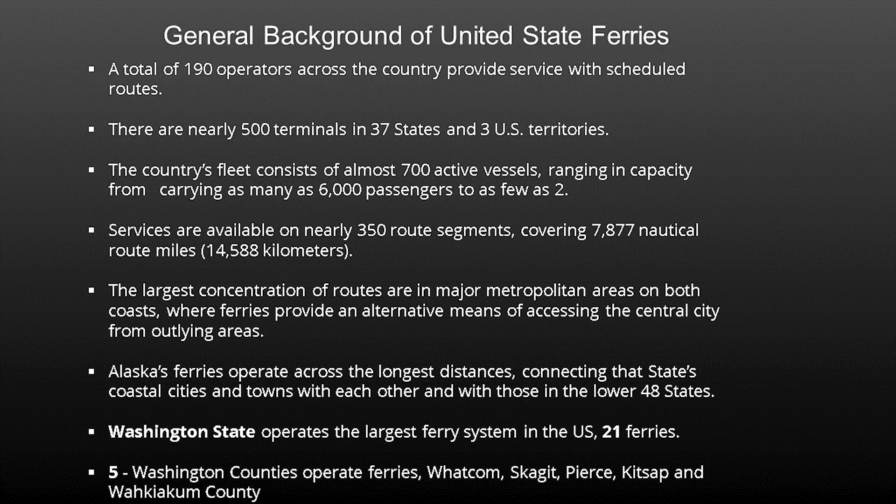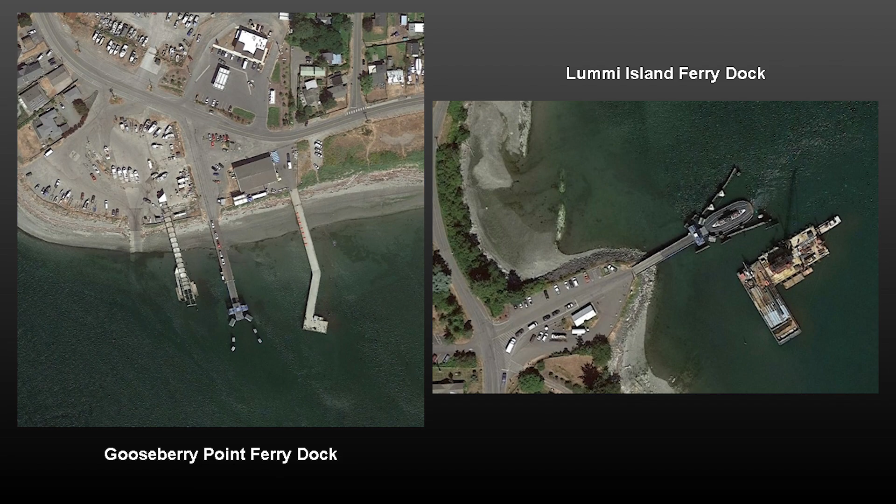It's got so much paint on it, when you actually go to the shipyard and they start to scrape it, it's almost a quarter inch thick of paint on this boat because we don't sandblast it down. It costs way too much.

It's crewed by 3 people, and I actually refer to this thing as the battering ram. This ferry has done more damage to more structure than anything. You always get those late calls and you find out it goes through the dolphins, it goes through the breakwater, it goes into the waler, or whatever it may be. It's always something.

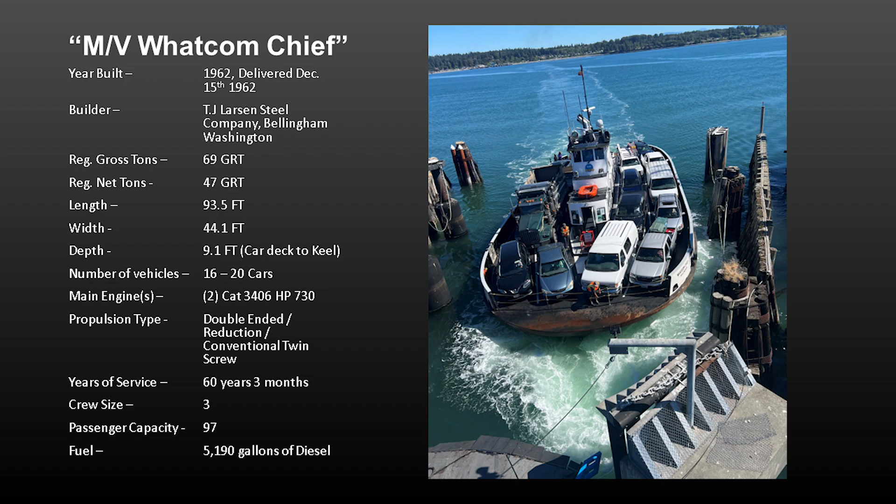With that, the boat only drafts about 5 feet of water, even though it has a 9-foot height. It only carries about 16 cars, especially if you put a truck on it. One semi-truck with a trailer takes one whole side. And the ferry is so tiny that when you're in your car, if you have to get out because it's sinking, you better roll down your window, you cannot open your door. So that's another reason why we're getting a new ferry.

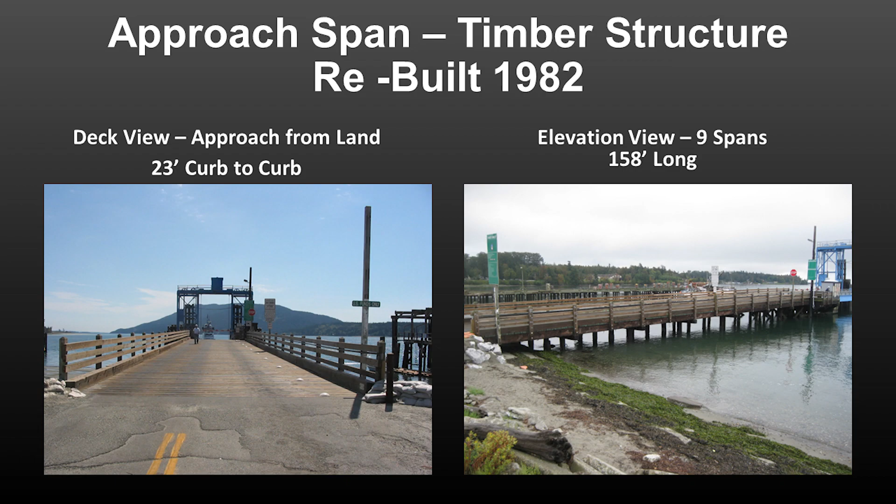So these are our approach span. The approach span was rebuilt in '82. It's 23 feet wide from curb to curb, 158 feet long, with a number of timber bents. This is the first structure to the next structure.

Basically, your elements on it are your typical rails. They're timber, it's all timber, this whole entire structure. We got treated timber, which now I'm no longer allowed to use over water, which is an interesting problem. And the deck on this thing has been replaced, so we're working on the third time right now since the time it was built.

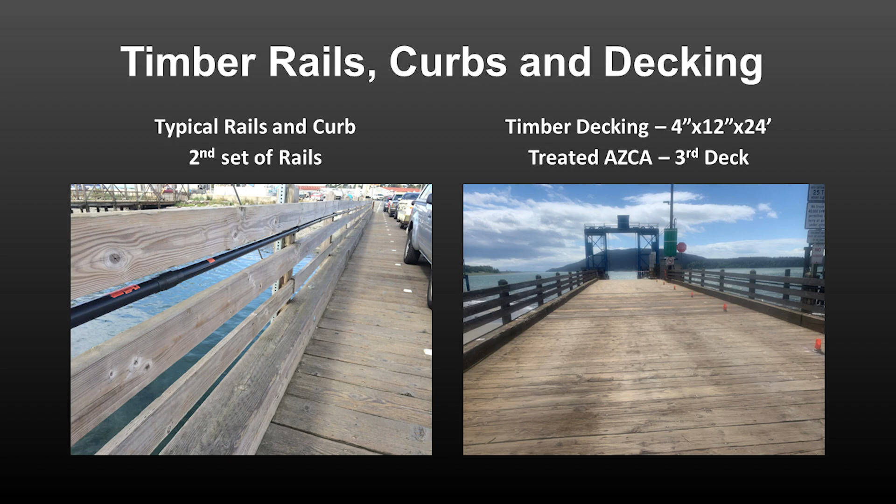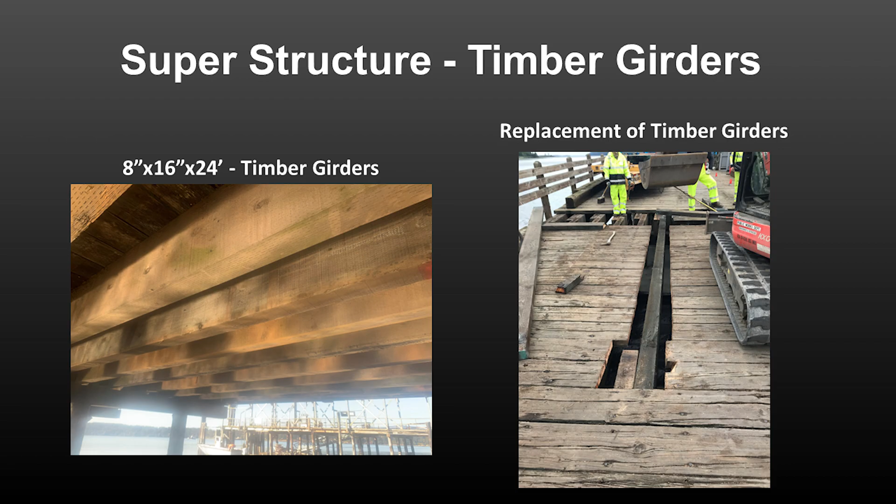Superstructure is just timber girders. They're pretty good size. We cut a hole through the deck so we can replace that girder, and then we replace the decking, of course. That girder I brought up on my personal truck because we couldn't get our crews down to get it, and we were waiting for months, and it was an emergency. So that's the kind of things we do.

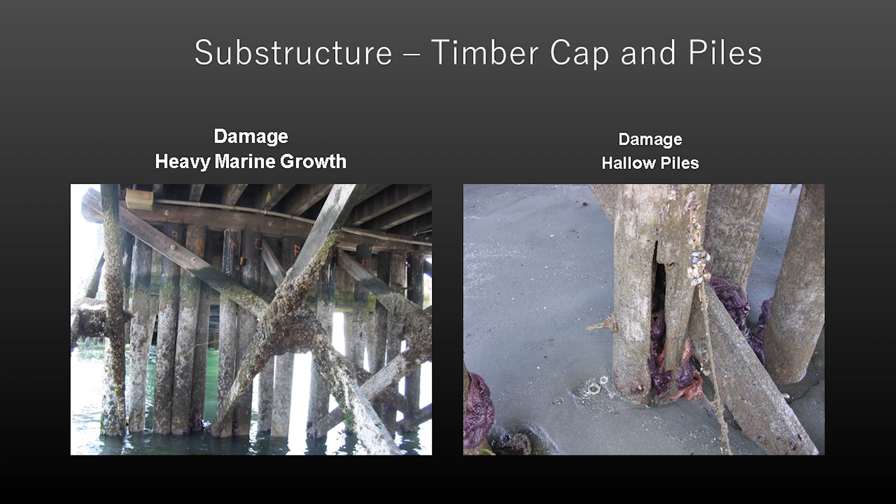The substructure on this is some of it the original structure before the rebuild. This structure was built, from the only information I could find, in the early 40s, most of this timber structure. That bent of all those piles has got added piles. Some of the original piles from the original structure are in there. You can see we get hollow piles from the marine growth on the bottom, or worms and things like that.

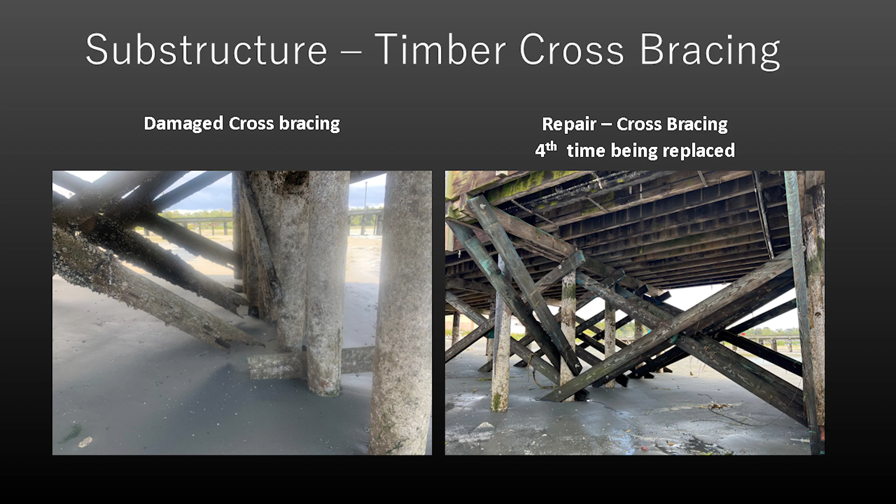Cross bracing, I just want to put in there, this is the fourth time, the third time since I started with the county, we've replaced this cross bracing. It does not last very long. Even being treated, with logs that are in our water hitting it and damaging it, it's just continually a problem for us. And it's amazing when this stuff is not in there how much the structure moves. It wiggles pretty bad.

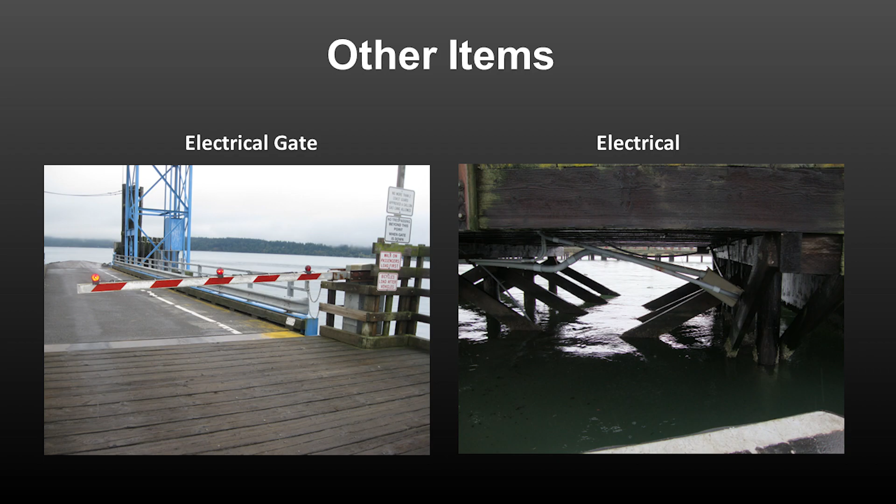The other items on this particular structure is electrical, which you can see is hanging. We're always fixing things like that. We get logs that rip it down. And then we have a gate on it.

You can always tell a new islander too. They always got a pretty car. All the islanders that have lived there a while, their car is not in good shape because we are over saltwater.

So the next part of the structure, like I said, the timber one feeds this one. So really it's one giant facility, but they're two different structures. This one was built in 1986, and it's a steel transfer structure. I just wanted to show you what it looked like coming in as you're coming on the ferry, on the left-hand side there. And the right-hand side is, of course, an elevation view of it.

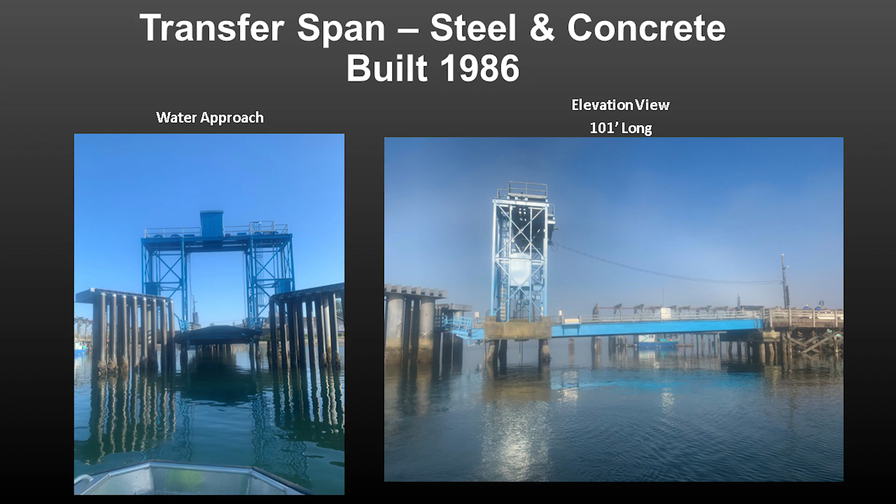The decking, it's asphalt over laminated timber, and it's got steel handrails, guardrails, timber curbs, and it's 24 feet wide. This asphalt I've replaced twice, and it's ready to be replaced again, because when you're paving over laminated timber, it doesn't last. It's just constantly breaking up.

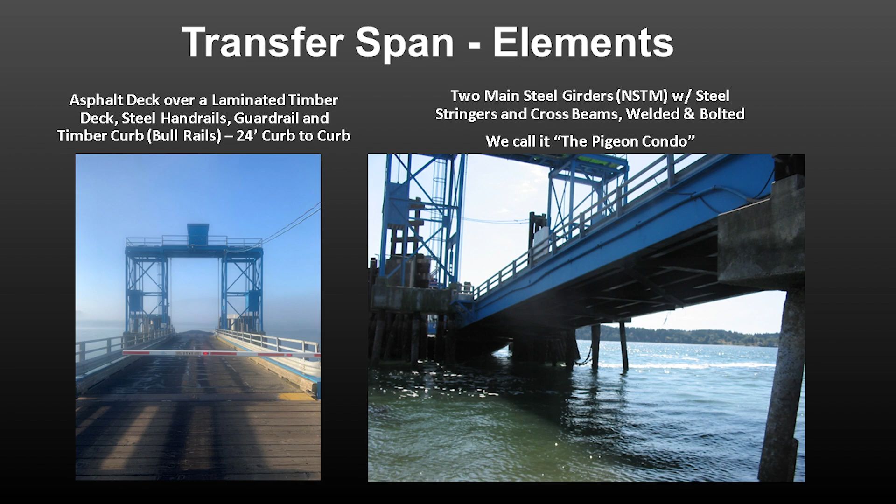Then we got to deal with, of course, we got fracture critical, which is no longer called fracture critical, but sorry, you'll hear me say that because I'm still trying to get used to the new term. We have two steel main girders with floor beam stringers and cross bracing underneath. We call it the pigeon condo. Every single cross member gusset plate has a pigeon nest on it. And we deal with them. They're heavy and they're thick.

And I learned that you never see a baby pigeon because they don't leave until they are full grown. So you'll never see a baby pigeon. So they make a mess. Their guano rips apart our paint. So we're actually using a paint system under here called coal tar, what they use on freighters, on big ships.

Then the other parts of this thing, we have our apron, which is at the end of the transfer span. That's what actually goes down onto the boat, so you can transition onto the boat. It's got a bat wing system, really hard to see in here. I don't know, can you see my mouse at all? That's all right, but it has pins that run all the way through there. You got pins at the other joints, so there's a lot of pins on this system.

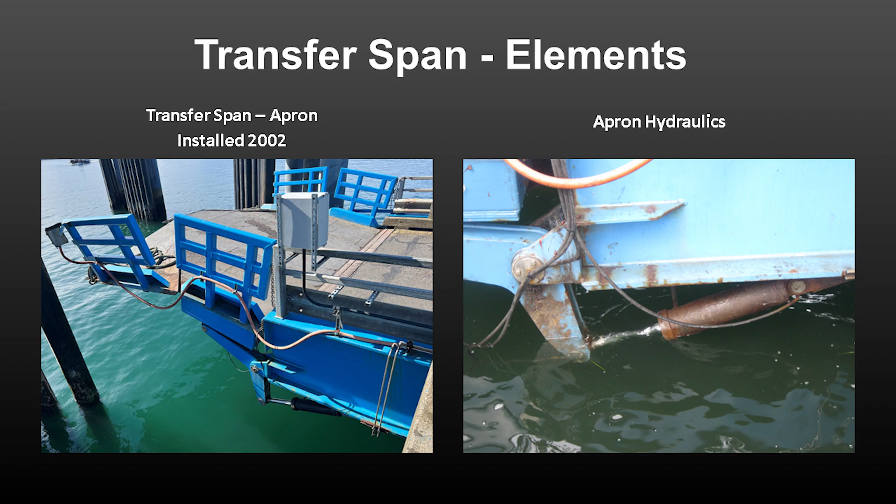And then we have hydraulics on here. And our ferry crew, since they don't fix any of the problems, they like to make sure our maintenance crews stay busy, they put this ramp into the water quite often on us.

I'm replacing those hydraulic arms twice a year. The salt water just tears them apart.

Other elements on this transfer: you've got your bearings up front on the concrete cap. We've got a concrete cap with steel casings with concrete poured inside, and then of course, we have cathodic protection on all the steel piles out there.

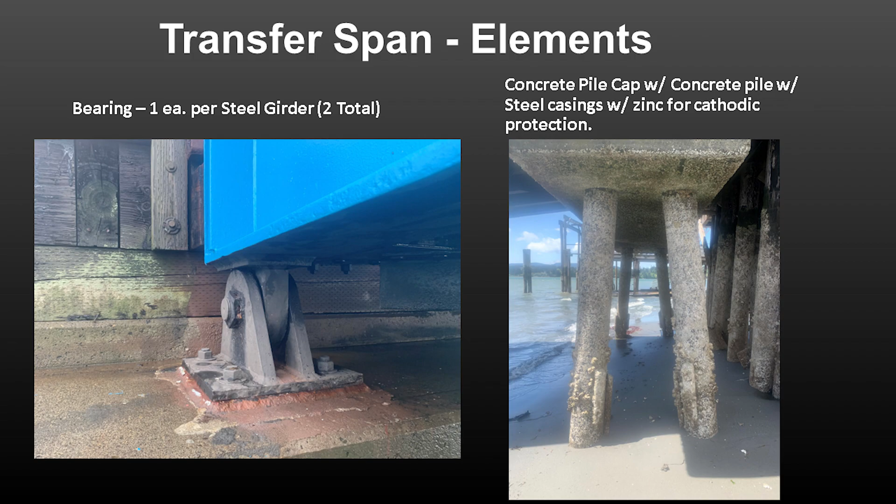Even with all the cathodic protection, we're still having traces of electrolysis on the boat. So it's an interesting area. We haven't found the power source that's causing our problem yet.

Got our head frame. Head frame is the upper structure. It's got the motor house up there that actually operates the transfer span up and down. And then we have concrete counterweights. There's 2 of them, one on each side, and they weigh about 22 tons.

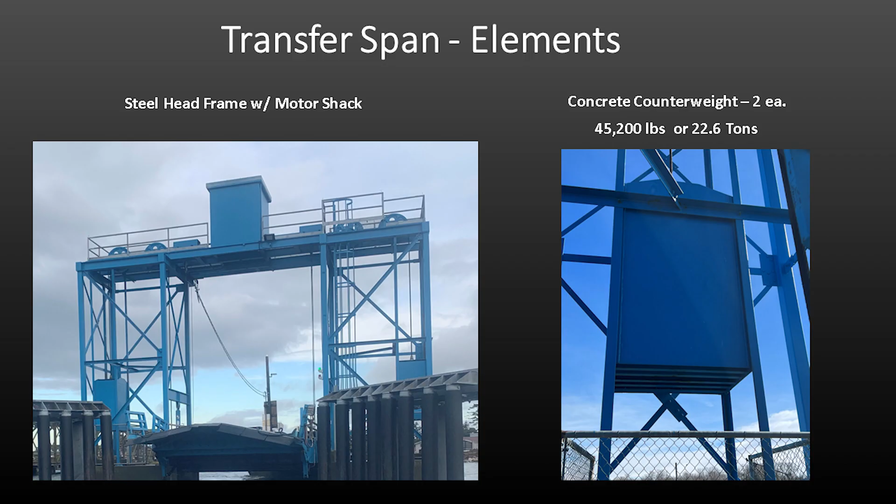It was kind of funny the other night. I was working on my presentation a little bit, and my wife walked by. She looks down and asks why we had a guillotine on our ferry. Kind of looks like it when you're there.

We actually have hydraulic pumps, and they're inside another box for protection. So if they leak, we have our motor up top in the motor house. That little 5-horse motor operates this ramp up and down.

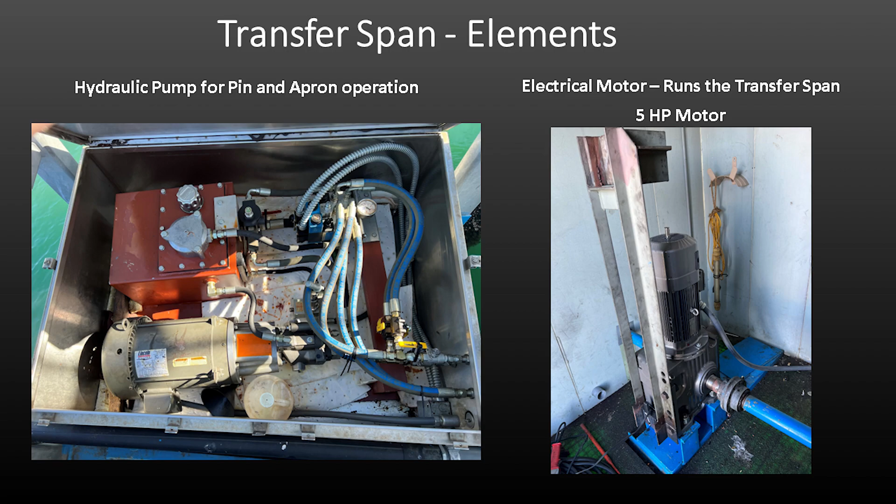You can see a little tiny nub on top of the motor. You actually hook a drill to that when this motor goes out. We can actually operate this ramp with a handheld drill. Yeah, but it's really slow. It just takes a long time.

It goes down, the motor goes down to a gearbox, then goes to 2 shafts that go out to the running lines.

Then we have, like I said, these fracture critical members. The most interesting one is the live load hanger on your right-hand side. It's really hard to see, but it's really bent. That's a common thing for us.

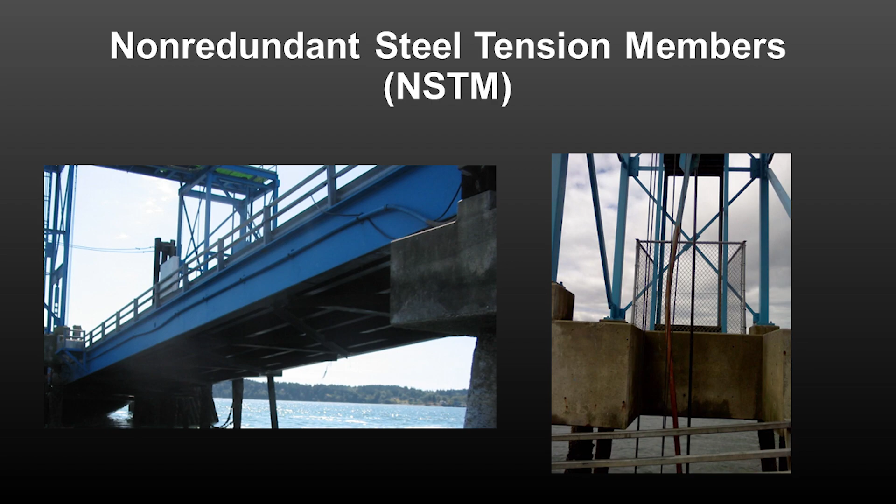This dock was built in a way that, when the pins are put in place, allows the transfer span to come up and allows that live load hanger to go up. It's fixed up top, so it just bends them.

Every time it bends, we're looking at $25,000 to get a new one. We've heat straightened them before. Washington State did a study - they heat straightened one of these live load hangers 100 times and said it's still safe, but our county has elected not to go that route. We'll heat straighten it maybe once or twice, and then we replace it. I've replaced 6 in 23 years.

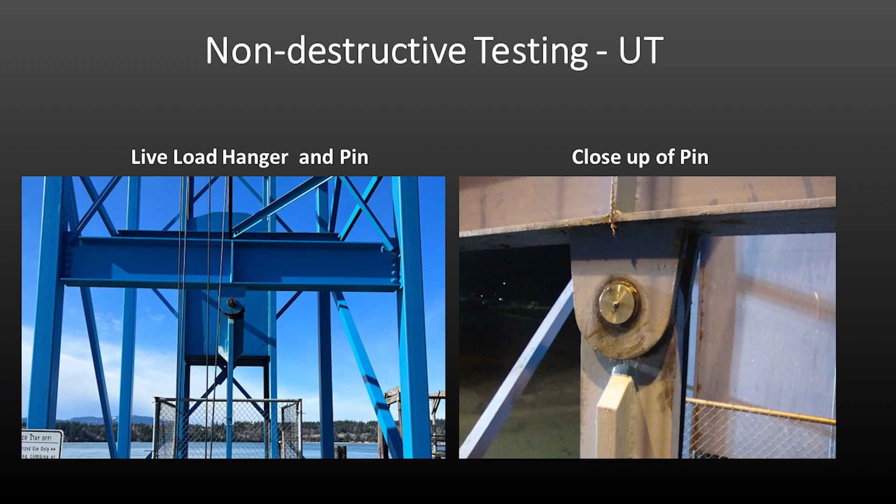This is the top of that live load hanger. You've got a pin that we UT. The interesting thing is we UT this pin, which is important, but the setup is really interesting because this live load hanger goes up to a metal facet up there, which is welded to the I-beam.

The I-beam goes across. It's bolted to 2 other tabs. So in reality, I think a lot of people don't realize - it's important to check that pin and pay attention to it, but it's all those weld connections too. You've got the tower, the I-beam, the bolts, they've got to be tight. If any of that stuff isn't properly secured, the pin doesn't really matter. So it's important to look at the whole system on this one.

Again, on this one, this is our transfer span. You can see the pin on the left-hand side there. It's actually pulled out right now. We UT that pin as well. Just above it, there are proximity switches.

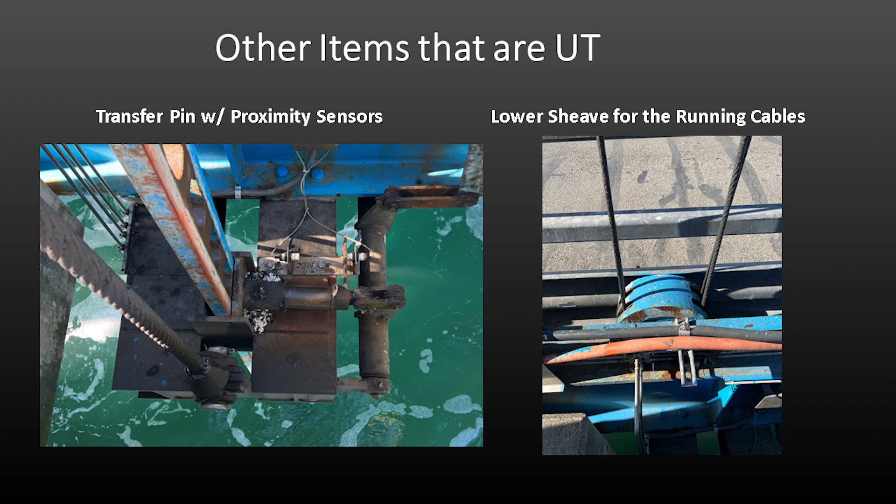Our ramp, we can actually operate it from the ferry. You don't need personnel up on the dock to run this one. A lot of ferry systems have people up on the dock for a good reason - usually when a person's on the dock, you don't have accidents. We have accidents quite often.

We've got lights that go on and everything, but they still don't pay attention to the lights. So we're constantly having issues. Our dock is, with it running that way, you have to make sure all your lines and everything are adjusted correctly, because if it gets out of kilter, the pins will not go in the holes. So then it creates other problems.

We've got our small sheave down there. That runs our running lines, which goes up to the house up top. The cable, the big one on the left-hand side, is 1.5 inches in diameter, just to give you an idea.

Up top, on top of the head frame, we've got our giant sheaves. Those sheaves are almost 4 foot in diameter, just to give you an estimate in size. We UT the shafts that go through each sheave. The other problem we've been having is where the sheaves are actually bolted to the head frame, they tend to crack on the pillow blocks there from stress. So it's one area that we have to watch.

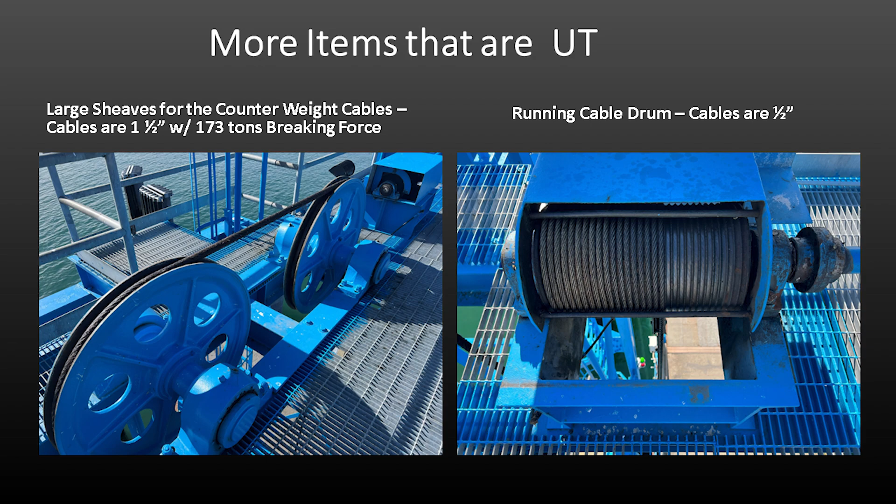The running line drum next to it, that one runs the transfer span up and down. You see the shaft going out, and it goes over to the motor house. Things we really watch on this one is if the crew - you can see that there's a little bar above and below, those were added. What was happening is the crew would set the transfer span, make the cables really loose, and then all of a sudden the cables would wrap over themselves, all this mess up there. So we put the bars in, it helps keep the cable from jumping as much.

Just some of the inspection considerations we have on this dock. Time of year, we like to do it when it's dry, just because the steel is slippery. It's on a 24-month frequency, these two bridges are. Tides, we have to do it at a low tide and a high tide, just for access reasons. Low tide so we can see all the piles as much as we can, and then high tide so we can reach everything. Of course, ladders, need a boat, man lift on this particular structure.

UT, fall gear, we have to wear when we're up in the upper structure, and then rain gear. The rain gear is not for rain, it's for all the grease. The dock is very greasy.

And then, of course, schedule. Sometimes we have to change the ferry schedule, and people don't like their runs being canceled. Our ferry runs from 5:30 in the morning till 12:30 at night every day. So it's running constantly, and it takes about 4 hours to inspect it.

And with all that running, our maintenance crews, they're greasing those cables every month. They're greasing pins. We're running the dock up and down, checking all our safeties that we do have, and running the hydraulics and running the backup generators that we have.

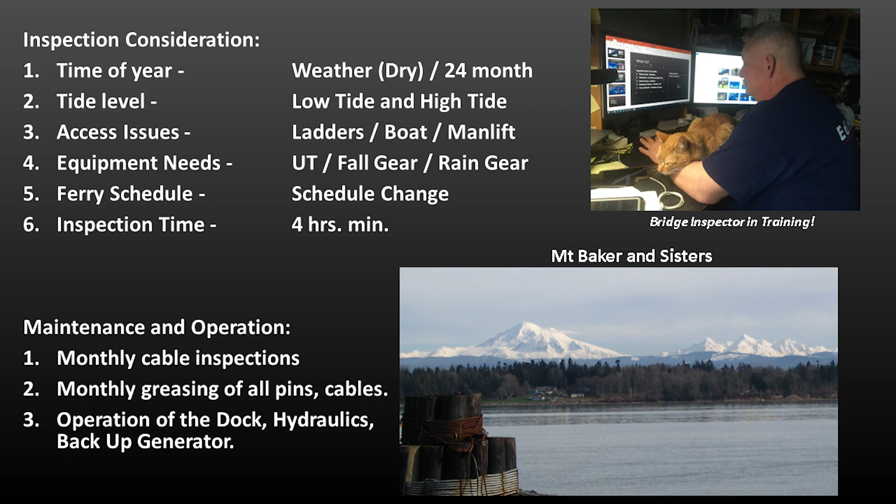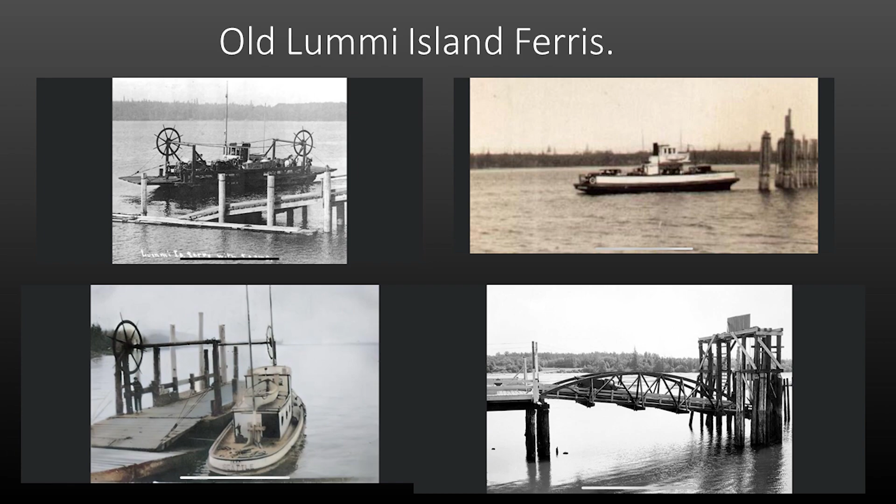And that dock you see there below, that was the Gooseberry dock. That's what we replaced in 1986. That's what we had in 1986, was that dock there. And with that, I'd like to thank you.

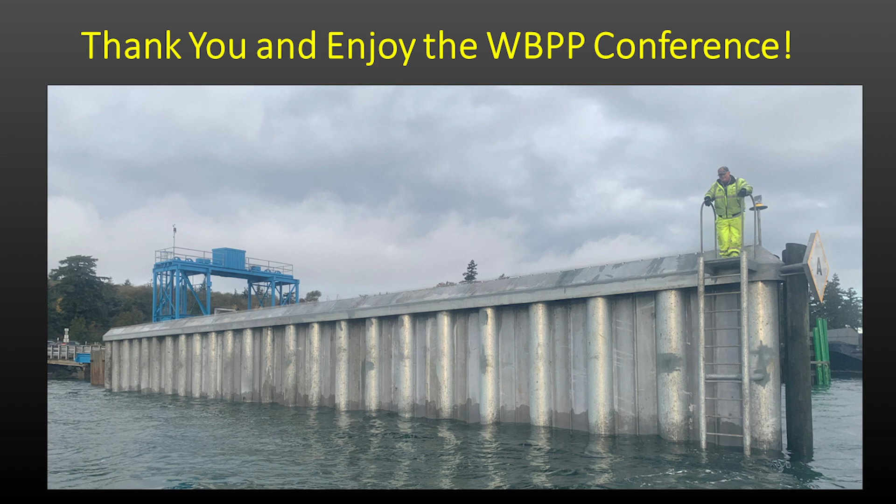The ferry systems are very expensive. Whatcom County, we subsidize our ferry system $2 million a year, just our ferry. So we collect fees, our collection fees, to pay for the operations. We can only collect 54% of the operating costs. That's our county code. So all the taxpayers in the county are paying for this.

The biggest problem is there's nothing on the island for anyone to do. So these islanders will get pretty upset with us sometimes, but I have to remind them that this is not a private driveway for them, and they forget that quite quickly. So we get yelled at a lot. Try standing on a dock with them all coming by you. So yeah, it's very interesting at times.

So again, I kind of started this to do something on elements, but the ferry system is a huge thing, so I could go on and on. So yeah, thank you.

Really interesting problems that you're dealing with there.

Any thought on using new mass timber that's coming out, like CLT or mass plywood panels, as a replacement for your solid sawn decking that's deteriorating over time?

We haven't yet. I know we would like to get federal funding, because the other thing I didn't tell you - this ferry, we're on tribal land. So that changes everything when we need to redo things. So we haven't pursued redoing that whole timber dock yet because of that, but it's in need.